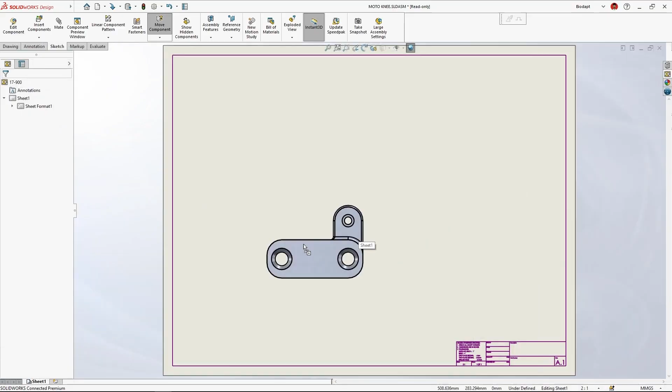SolidWorks Standard is the essential toolkit, the cordless drill of the CAD world. Perfect for part modeling, assemblies, and 2D drawings. It gives you all the fundamental functionality to bring your designs to life. Plus, it includes powerful features like sheet metal design, weldments, mold tools, and bi-directional collaboration on PCB designs, all standard.

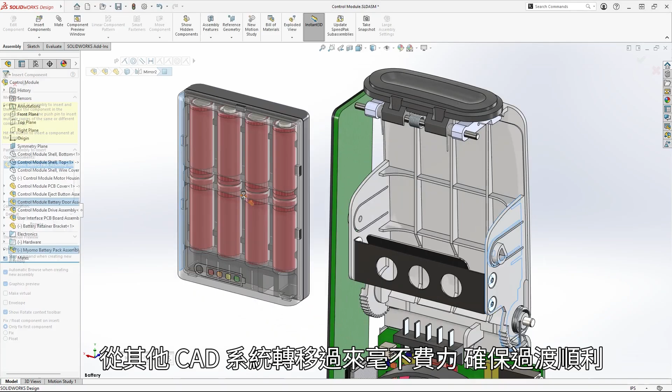Equipped with best-in-class CAD translators, migrating from other CAD systems is painless, ensuring a smooth transition. In manufacturing, we have you covered with full 2.5 and 3-axis milling right out of the box.

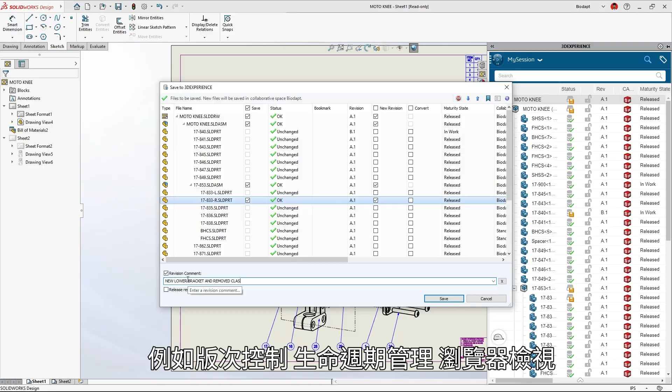And when connected to the 3D Experience platform, your files and designs are always accessible, right from the cloud. Integration with the 3D Experience platform gives you and your team enhanced collaboration tools like revision control, lifecycle management, and browser-based viewing, keeping your projects moving forward efficiently.

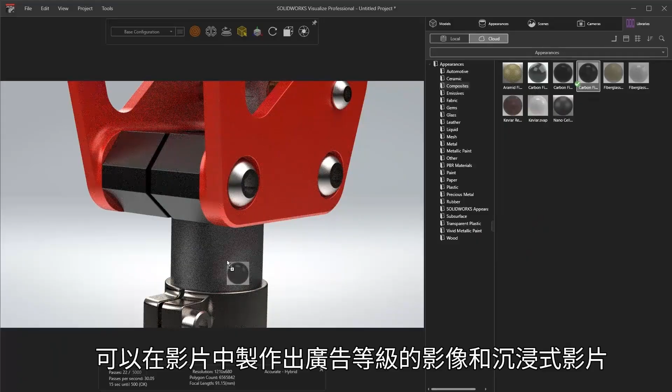Next, we step up to SolidWorks Professional, when you need to do more than just CAD. Just like adding more power tools to your kit, you'll step up to photorealistic rendering and create billboard-quality images and immersive video right from your CAD designs.

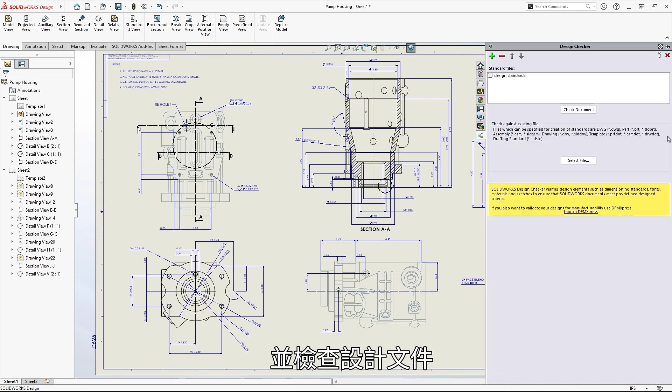It also brings useful additions like a complete hardware library and powerful design for manufacturing tools to analyze tolerance stackup, estimate manufacturing costs, and check design documentation to ensure you're adhering to company standards and maintaining design consistency.

SolidWorks Premium takes your capabilities to the next level with tools designed for engineering specialists. Predict real-world performance of your designs using FEA simulation to understand stress, deflection, and factor of safety before prototyping or bench testing.

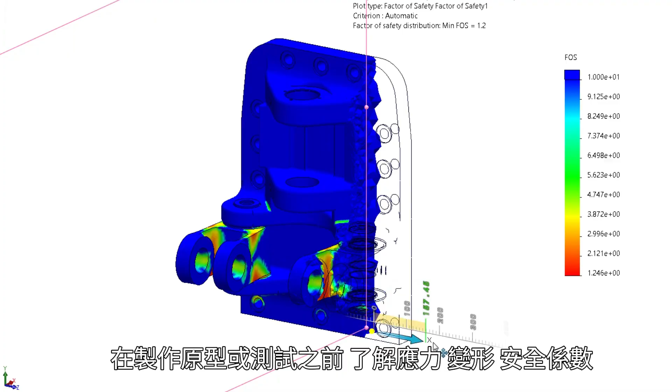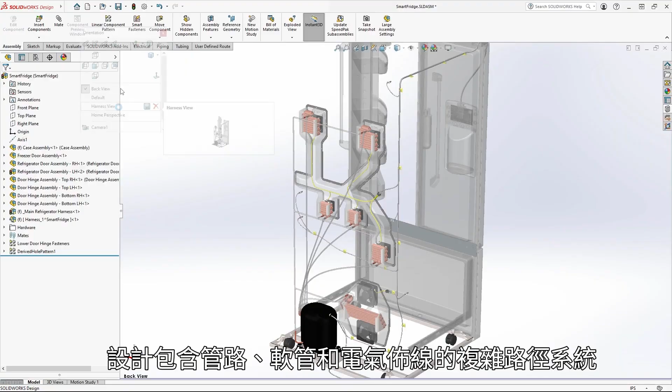Simulate rigid body dynamic motion to verify physical interactions, solve for motor sizing, determine reaction forces, and review automation cycling. Develop flat patterns for complex sheet metal stampings. Design complex routed systems consisting of piping, tubing, and electrical wiring.

A powerful set of purpose-built CAD tools that ensure your assemblies are built to spec with the flexibility to update as your designs change.

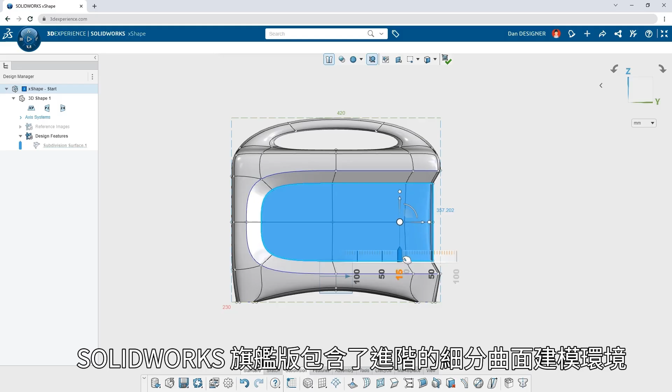And finally, there's SolidWorks Ultimate, the comprehensive toolkit for the power user who touches every aspect of product development. Extending from SolidWorks Premium, SolidWorks Ultimate includes an advanced subdivision surface modeling environment that allows you to produce highly organic, curvy shapes by simply pushing and pulling on your geometry.

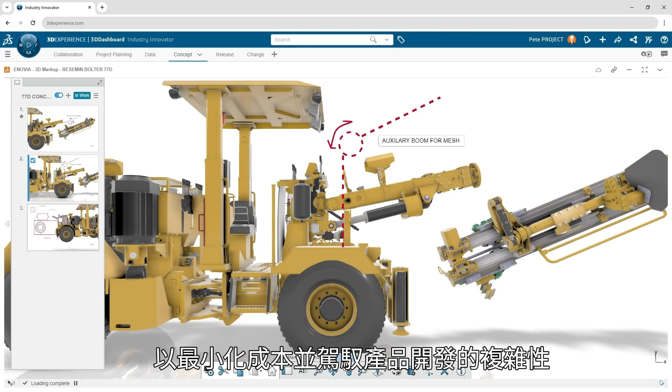Visual interactive planning tools like Gantt and Kanban chart creation for end-to-end product management and task oversight. Manage and control your entire product's architecture to minimize costs and navigate product development complexities. Conceptualize and release entire product structures.

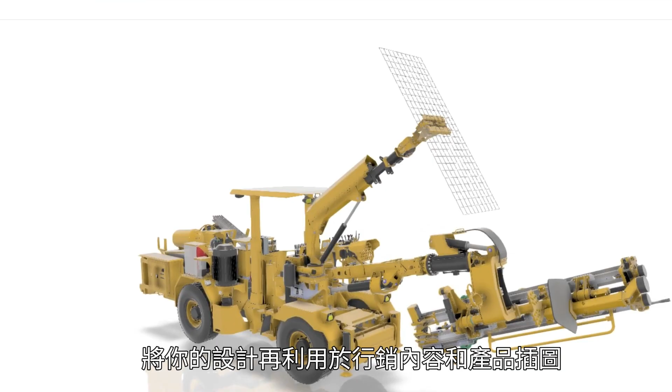And go beyond CAD to repurpose your designs into marketing content and product illustration. With SolidWorks Ultimate, your entire product development cycle, from concept to manufacturing, is fully connected, ensuring seamless teamwork and unparalleled efficiency. Which SolidWorks is for you?

Whether it's core CAD capabilities or an end-to-end product development solution, SolidWorks has the right set of tools, and they work together seamlessly on the 3D Experience platform, just like your favorite power tools sharing the same battery. No matter which SolidWorks you choose, your team is always connected, empowering you to build, innovate, and collaborate like never before.